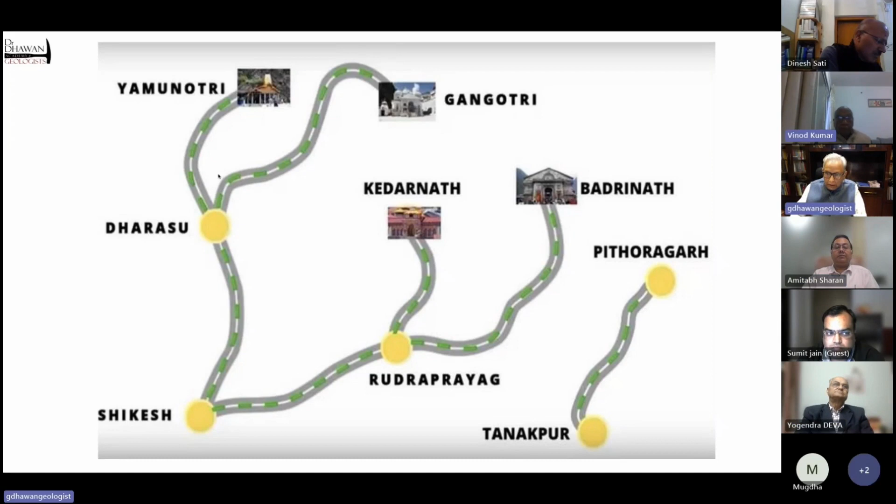This tunnel, Silkyara, is towards the Yamunotri side, between Yamunotri and Dharasu. After completion, this tunnel will... this is the portal of the tunnel, the Silkyara portal, as we call it. It is a 4.5 kilometer long highway tunnel, semicircular in shape, with a 12.4 meter base and 7.5 meter height.

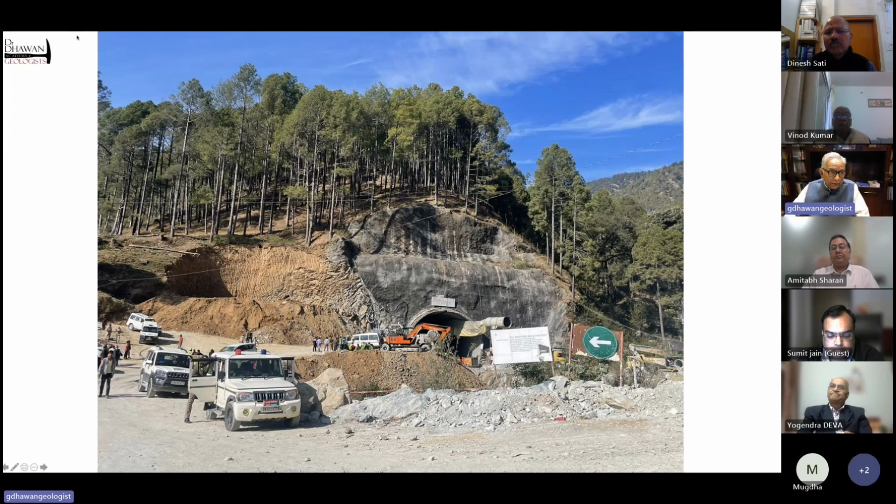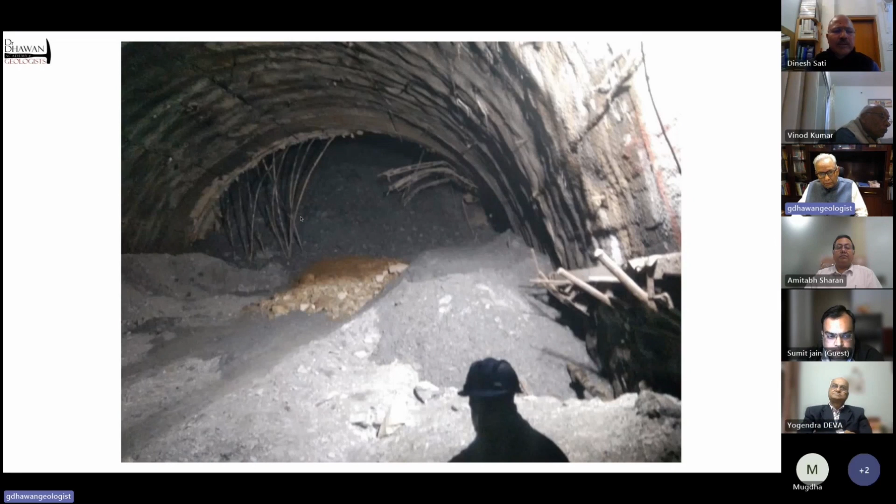One portion of this tunnel collapsed between chainage 205 and 260. These are the initial pictures of the collapse. Almost a day after that, this was the picture. You can see that debris is visible at the face, and a lot of lattice girders in broken shape are also visible.

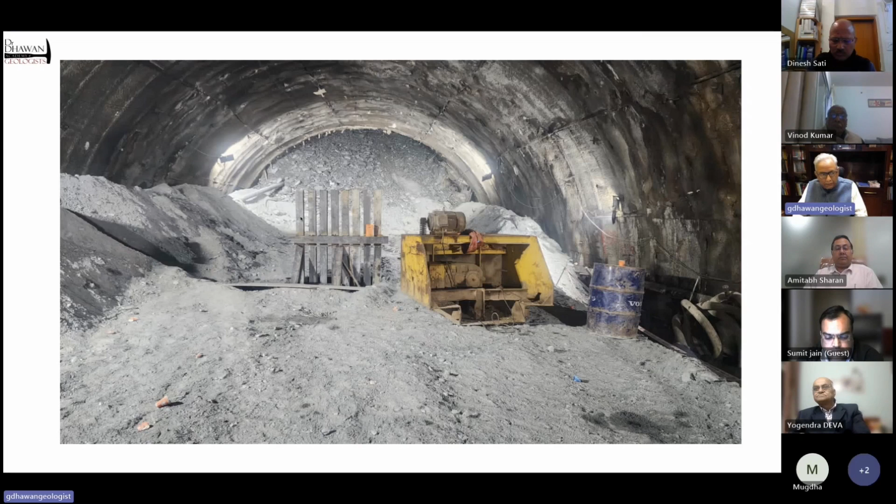Immediately after, NHIDCL, through Messrs. Navyuga Construction Company, who are the contractors of this tunnel, started the rescue operation and began removing the muck. However, as all of us associated with tunneling operations know, it really doesn't work that way, because the more they removed, the more came in. So you can see in this picture that the original mass of debris has now increased.

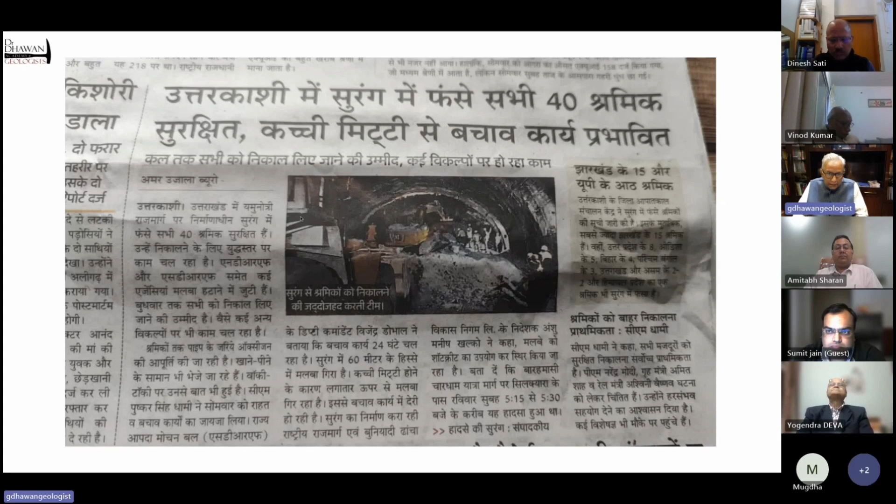Somehow there was a 4-inch diameter pipe, the original pipe, which became the lifeline for the workers, and it continued - the authorities continued to support the trapped miners through this, and the news was that they were safe and some basic necessities were being given to them.

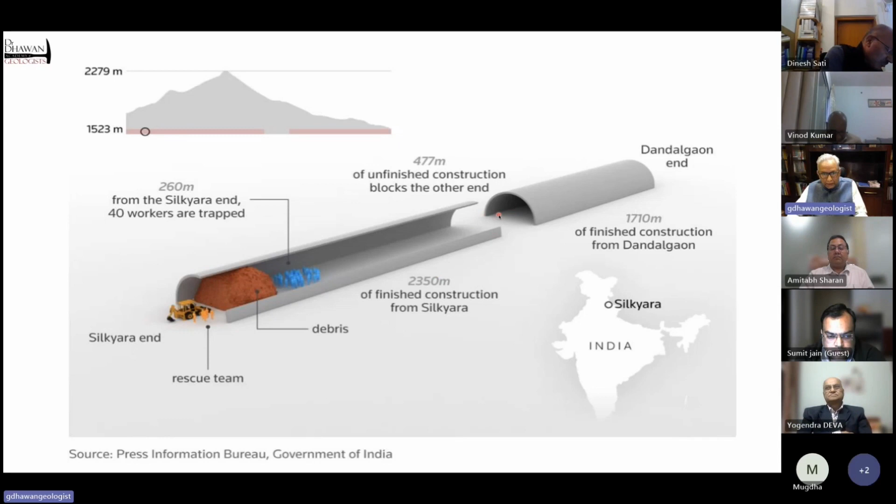Rescue operations continued through several means, which my colleagues and co-panelists will explain further. But in nutshell, once they realized that removal of muck will not succeed, an old auger machine was deployed from Uttarakhand irrigation, but it also broke down very soon. Then an American auger machine was brought in, but that also broke down.

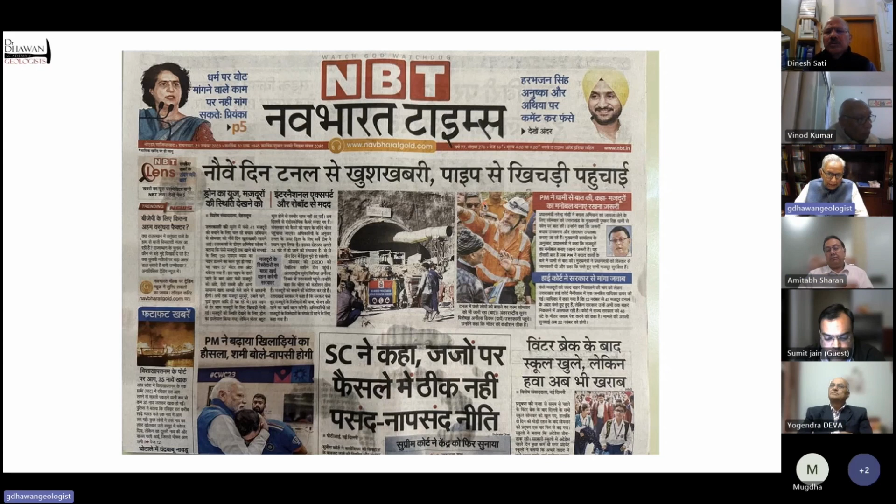But parallelly, NHIDCL continued to construct a second lifeline, and through that, by the 9th day, a 6 inch dia pipe could be inserted, and communication could be established with the workers. Finally some solid food was given, and an endoscopic camera was also installed there. So this is all. I think I will come back in the second round if you want more information from me. Thank you.

Thank you, Dhawan Saab. Thank you very much, that was a very good introduction to the tunnel. Having done that, now I think it is time that we had a look into the ground conditions of the tunnel, where such a collapse took place.

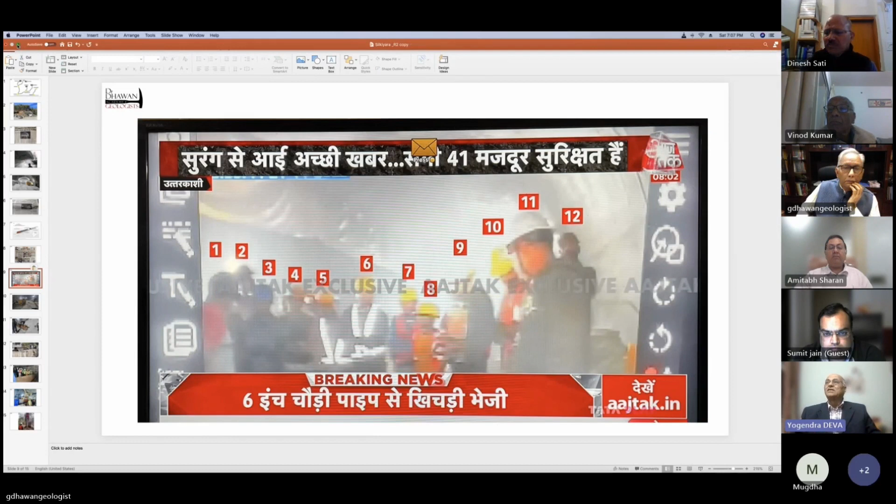So let us start with the initial work in that project area where the initial engineering geological assessment was made. We have with us Dr. Dinesh Sati, who has done some wonderful work there, and we believe his projections have proved right. I will now request him to brief us exactly what the geological assessment indicated, and what recommendations he gave for smooth tunneling in this project. Dr. Sati, please.

Thank you, Dhawan. I was involved in the project in the initial phase where the tunnel alignment was fixed by me, and the preliminary feasibility investigations were done in 2012, March-April. Because there was no immediate access to the tunnel alignment, geological information available on the outcrops along the highway were projected onto the tunnel alignment. To the best of my ability and knowledge, I projected the rock mass parameters and all the geological information on the tunnel alignment.

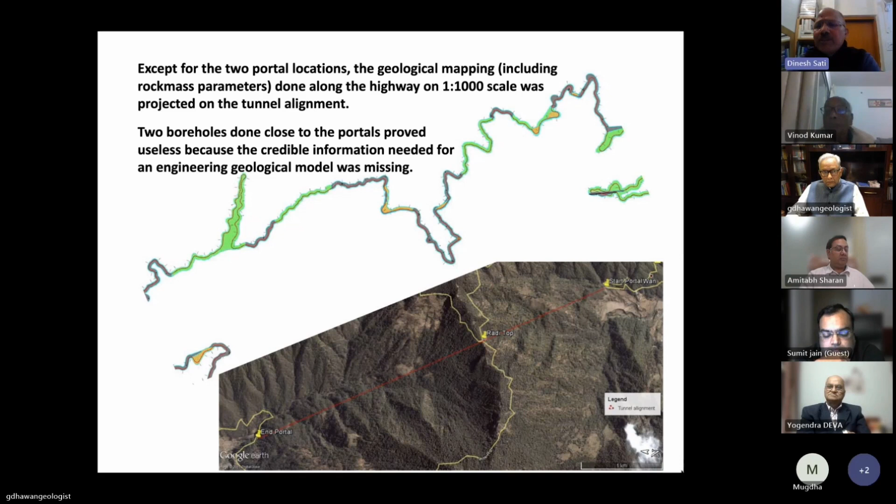Except for the Silkyara and Barkot tunnel ends, where I had enough outcrops to know the rock mass and structural parameters, on the chainage 300, CH 300, I projected the contact between the amphibolites on top with the siltstone and fine-grained sandstone sequence. That contact of about 40 meters was suspected as sheared, and exactly on that area only the tunnel collapsed, because it was already a sheared zone.

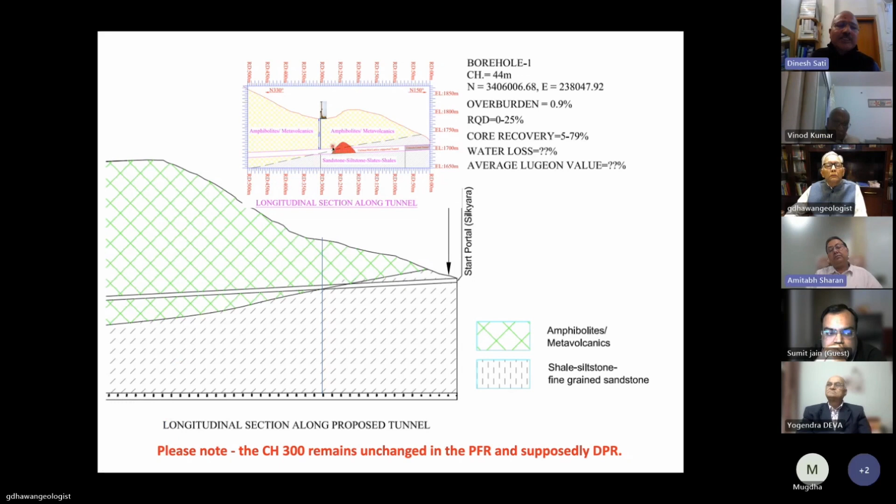But I don't know if further investigations were done by the authorities involved in the project execution. This picture was already there in the drawings which were supplied, for excavating and drilling from the top of the tunnel ground, passing exactly over the 300-meter chainage.

Metasiltstone, sandstone, and slates, often referred as phyllites, are class 4, class 2 to class 4, ranging in strength. But the amphibolite and metavolcanics are very strong rocks, class 1, class 2. The zone between these two formations, two different rock masses, is sheared on the outcrops I have seen along the highway, because conditions inside the tunnel should be a little wet, so the rock mass parameters go down. That is why this whole section experienced this cavity and all events, especially between the 200 and 300 meter chainages.

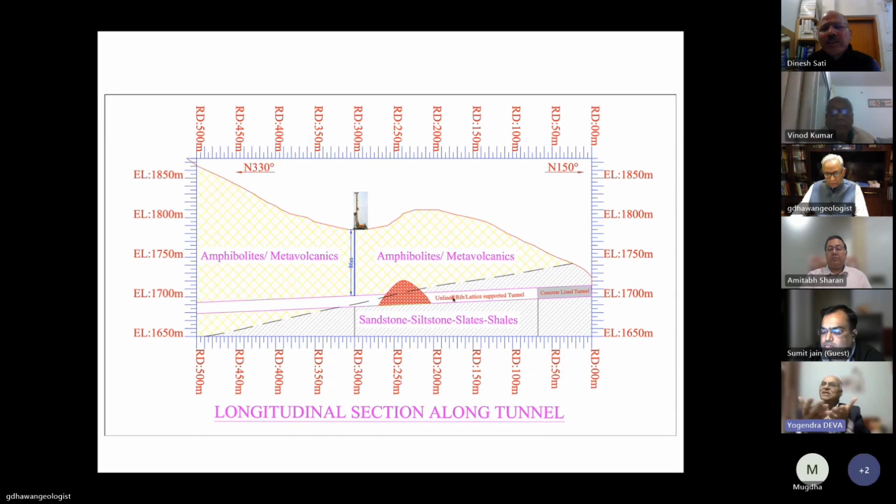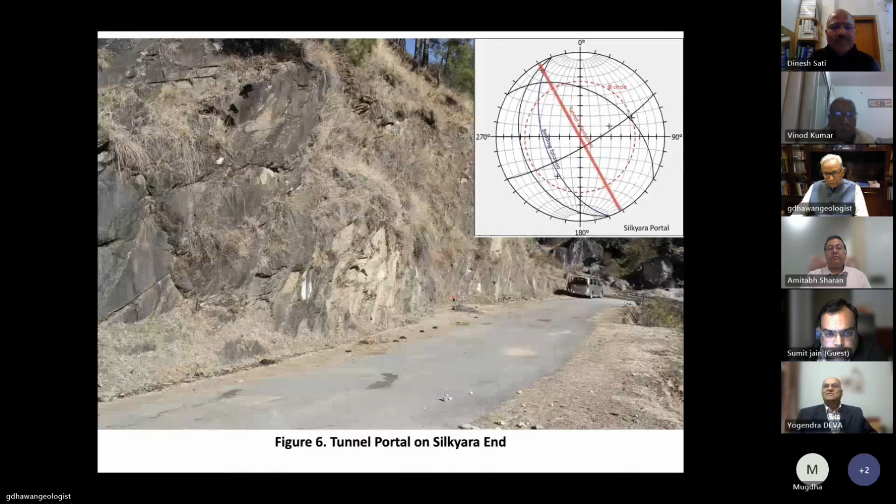It's very good, looks good. Yes, it's good. Only the zone between 200 meter and 300 was the critical zone. Can we have a look at the plan, at the springing level plan? Yes, briefing about the shear zone there. Do we have any other plan here? I think yes, this one.

The bedding orientation is not exactly parallel to the drive direction. There is a 27 degree variation, so it goes obliquely, and the zone was not so difficult for the tunneling.

Every shear zone has a thin zone of intense shearing, and on both sides the rock mass gets better. So this highly sheared zone should be much less, but of course the entire band between 235 and 300 changes. This was considered as class 4 or might go into class 5 also. As I see here, you are showing the width on the plan to be about 40 meters. But obviously because of the angle between the strike and the tunnel direction, this width will increase along the tunnel, and that is why we are getting such a large span failure in the tunnel.

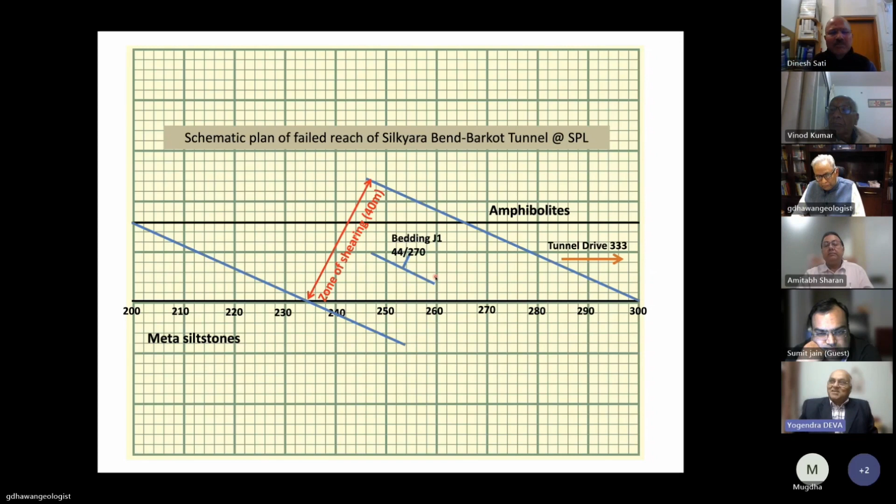Thanks for your observation and comment, Dhawan Saab. It's a remarkable job which has been done in the PFR stage. Now I understand that we have Amitabh Sharan with us, and he has been associated with the detailed engineering investigations. I think he must be having a lot of information after Dr. Sati made his exit from the project after his work. So, Amitabh, can you share with us the data which you have, or the experience for this tunnel?

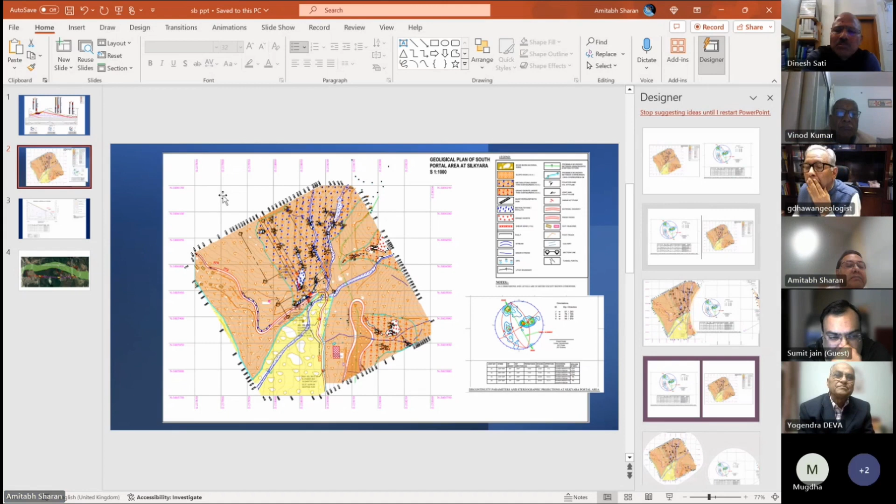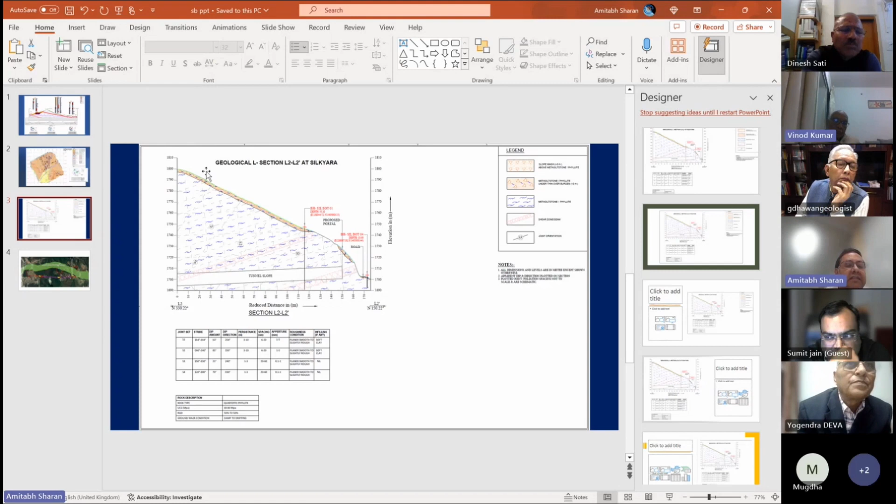And this is the closer view of the section. This is the foliation direction. The lithology is metasiltstone, or you may call it phyllites. It's in transition in between. So this is the one map of granodiorite intrusion.

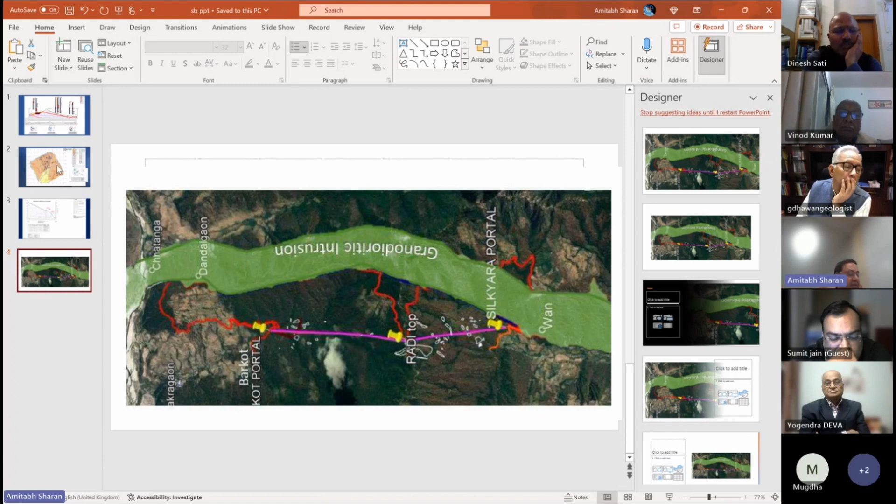We got that from some Google paper, so we projected this data also. So in our projection, this band has gone below the tunnel alignment. And during construction, most of our sections, what we projected till date, has already matched with the actual construction at site.

So in my interpretation, the entire tunnel alignment is driven through the soft metasiltstone, which is highly crushed. At some location it is enriched in muscovite also, phyllitic, sometimes it looks like phyllitic in nature. Accordingly, we already gave the details to our designer, the Bernard, Austria. They have designed based on our geological input.

Thank you. Right. Thank you, Amitabh. I notice one thing here that I can see at the Silkyara, the geophysical survey result shows a low resistive, low velocity zone, which is almost touching the tunnel ground. Yes, that end.

But that rock, where the low velocity zone is coming, that rock should be the competent amphibolite. No, sir, it's not amphibolite. In my projection, that amphibolite or that granodiorite intrusive just goes below the tunnel alignment.

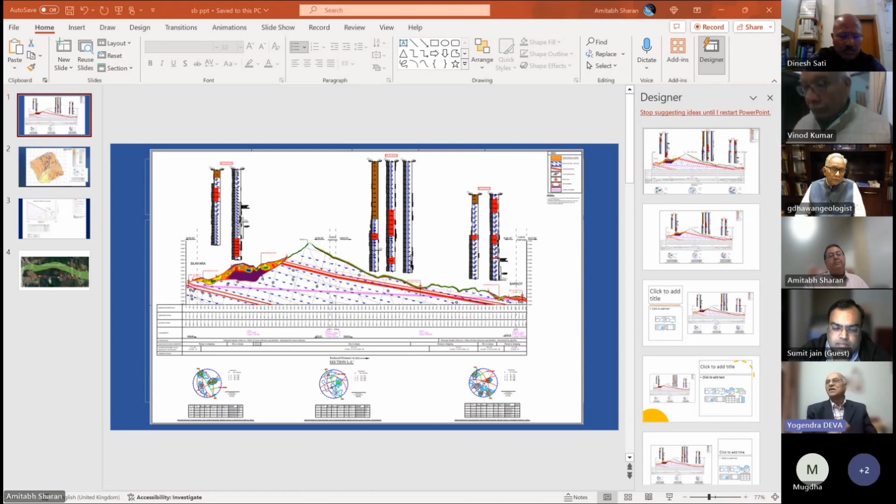Before we go to the other technicalities, I will turn to Sumitji and ask him what he thinks about the design of this tunnel. I am representing the audience here, I will say I'm a layman. I understand probably that all tunnels like this, transport tunnels, have an egress, and egress is normally a parallel tunnel which goes along the tunnel alignment. So had an egress been there for this project, maybe this rescue operation could have been easier. So from that angle, I would like to learn from him what he thinks about the design of this particular tunnel, where at least I don't see any egress. Sumitji, please.

Coming to regulations for safety in transportation tunnels, there is a particular requirement that the safety or escape path for tunnel users, be it during construction or operation, should be totally separate and isolated from the main tunnel being constructed. We can take the adjoining tunnel as a safe escape path, or if the same tunnel cross section provides a safe area for escape, this should be available for rescue of persons under all possible events. For example, in the Atal tunnel, the safety path is just below the carriageway of the road. That strategy is perfect when it comes to regulations for safety in transportation tunnels.

So in no case should the tunnel not be available for rescue. That is the prime concern and the main strategy for designing the project.

Coming to Indian Railways, a separate escape tunnel is already mandated by the Railway Board, and all our railway tunnels have an escape tunnel parallel to the main tunnel, which is a non-traffic tunnel. For all tunnels more than 3 kilometers long, we provide such provisions.

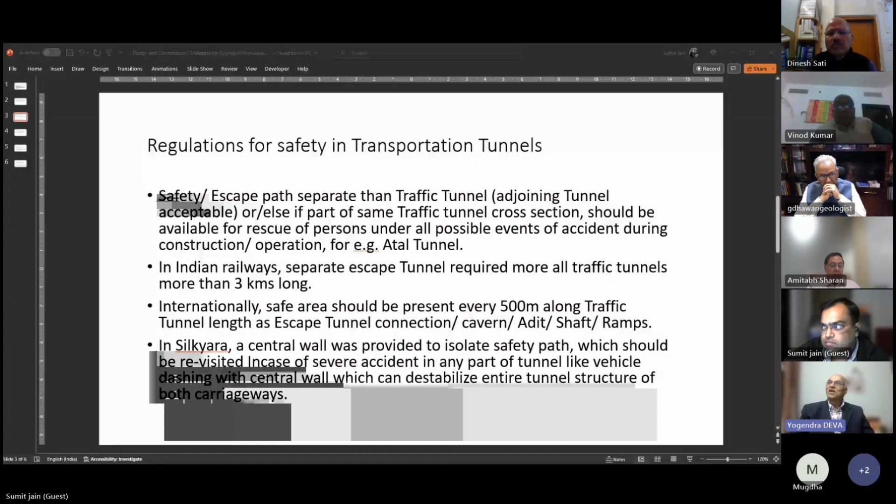Thank you, Sumitji. This is very interesting and quite illuminating. Having introduced ourselves to the ground conditions about the design and other things, now I think is the time to come to the main rescue operation and its technicalities. For that, we have a very experienced tunnel engineer, Vinod Kumar. I will request him to kindly enlighten us on what exactly was done there and how it could have been done in a better way, whether it was possible.

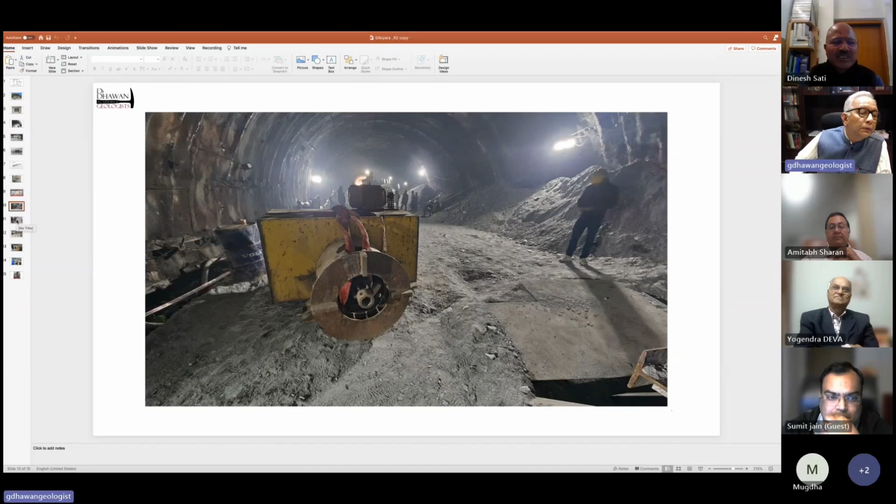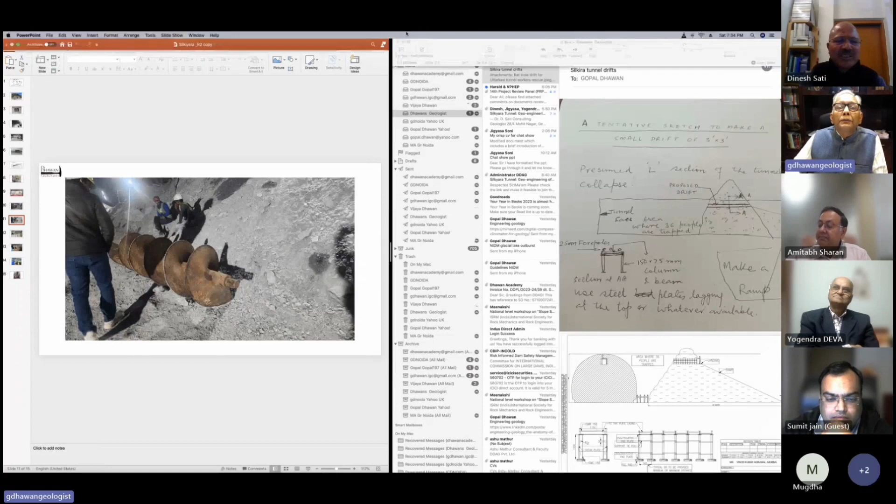This is the long shot of the tunnel where rescue operations were going on. This is the old auger machine which was pressed into service first. As per the newspaper report, this belongs to the Uttarakhand Irrigation Department. It was tried and worked for some time - it went a couple of meters ahead, but finally broke down.

What happened with this machine was - the function of the auger machine is, you see the spiral blades, so as it cuts the debris mass, it spirally brings out the material, and a circular hollow space is created. The idea was to insert 900 mm pipes by jacking.

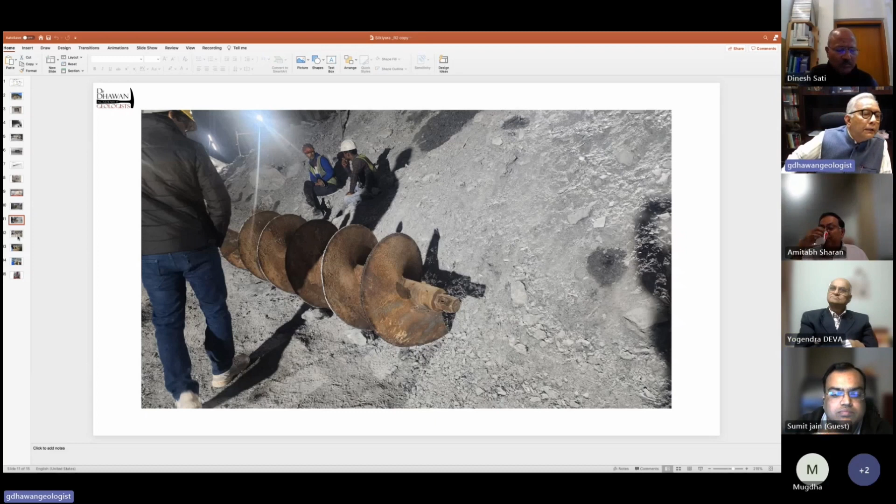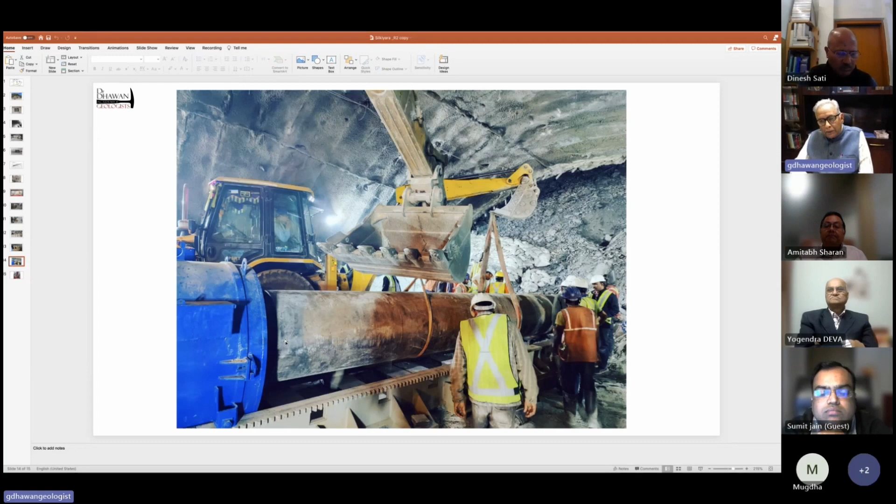So this was the original machine, and when it did not work, then this American auger machine was brought in, the blue colored one, and the pipe is inserted through this. This machine also broke down after going about 25 meters or so.

So there was a state of panic when it happened. Everybody thought that now everything is finished. At that stage, the leaders who were leading the rescue operation there from various departments stepped up.

One good thing about this rescue operation is that the whole of the country joined hands together. Can you imagine there were more than 12 government organizations, all very competent and specialized, who were there - namely NDRF, SDRF, NHIDCL, Geological Survey of India, our own department, ONGC, SJVNL, Rail Vikas Nigam Limited (RVNL), RITES, Border Road Organization, and Indian Army. Coal India was there because they have a lot of experience handling mine collapses, particularly in Mahabir Colliery where there was a collapse and they rescued everybody through a vertical hole. Then CIMFR was there and Uttarakhand departments were there.

All the good private companies tried to join the rescue operation, and many of them did it voluntarily. Like our friend Dr. Sanjay Rana, he sent his geophysical team from Parsan Overseas, which he owns, and they did a wonderful job to support the rescue teams so they could look ahead and see what lies ahead of this auger drill route.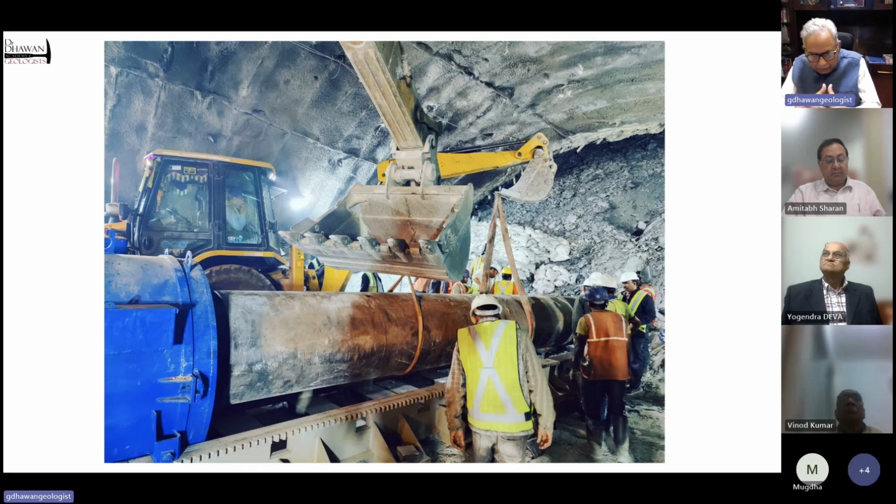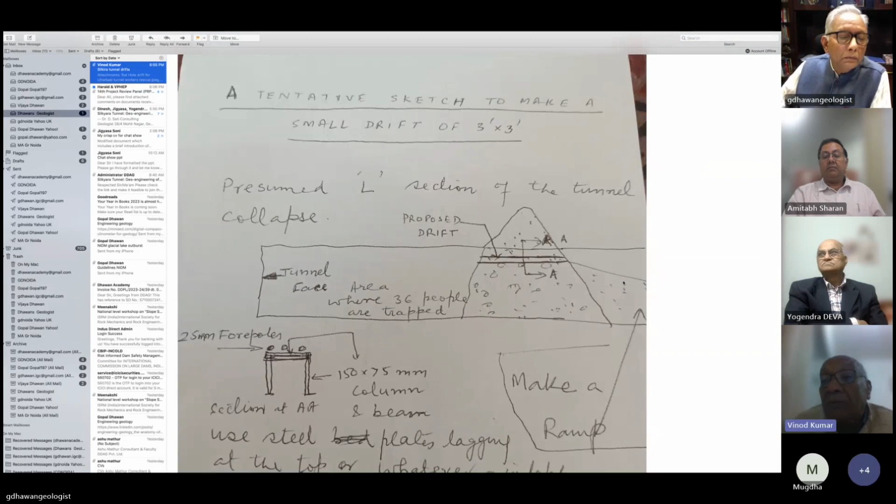I have heard Dr. Sati, Mr. Jain, everybody, very nice. But then the point is to save the people in minimum time. That was the objective above all else.

The arrangement of putting pipes in the hole, or vertical drilling, everything - for mobilization of every activity, it is time consuming.

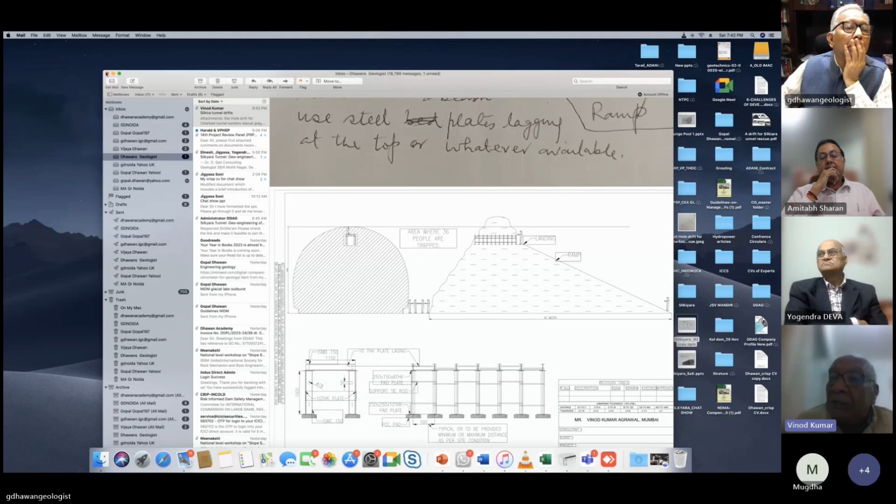So my idea, as I gave in this sketch, was a small drift at the top. And Dr. Dhawan, the people who made this drift, are simple workers. You can call them rat miners, because to construct a 1 meter by 1 meter drift is not a simple thing - you have to go crawling in a very limited area.

Why 1 meter by 1 meter? Because the excavation quantity should be less, and you should have more linear progress. That was the idea. Anyway, now the job is done.

My point is, for the future, this type of program should be given to disaster management people, that in any project, if such an eventuality takes place, no mud removal whatsoever - they should try to approach access through the fallen mud by creating some passage, whether through small drifts or through pipes, as they did it.

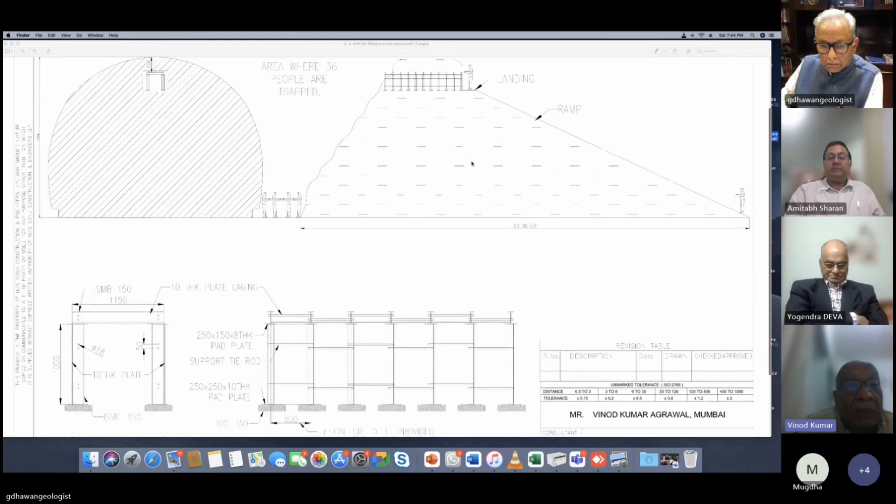Now pipe pushing - again, this machine is not regularly used in any tunnel projects or sites. It is a bought-out item, you have to arrange it, like micro tunneling, you have to order it. So here it was ordered first - they arranged a machine from the Uttarakhand government, then a second machine from somewhere else.

And one thing is for sure - the machine broke down not because the machine was faulty, it broke down because it came in contact with a boulder.

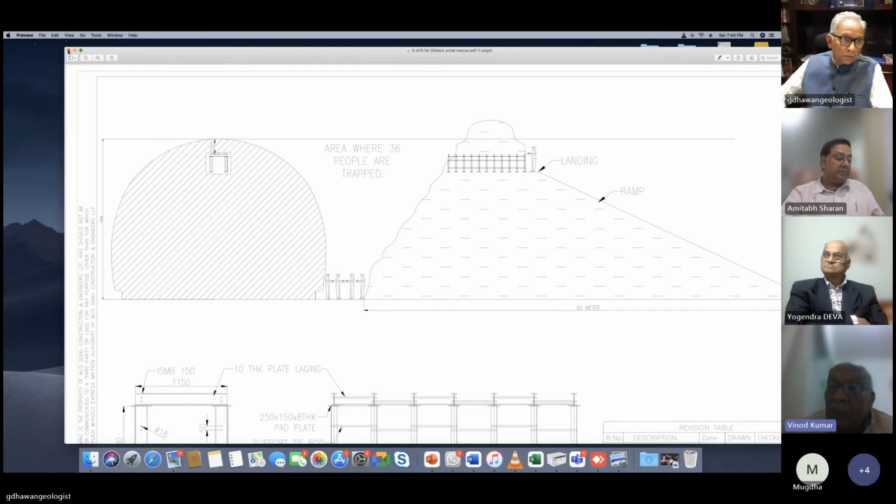Those lattice girders which were lying below the buried mud broke due to that fact. I had one gentleman, Mr. Harpal Singh, who was supervising this work and was involved at this site. He gave me feedback that when they were trying to reach after 45 meters, he suggested there was a jumble of girders in front of the pipe, and they would not be able to break these pipes with the auger. They contacted the owner of the machine, who said his auger was very strong and could cut anything. They put the auger inside the pipe again, and it got spoiled. Ultimately it had to be cut and taken out one by one. So that activity delayed the progress.

At 45 meters initially, when they had reached and encountered the steel in front of the pipe, they should have simply stopped the activities, put the rat miners or welders and gas cutters inside the pipe, cut those things and removed them one by one. Probably they could have saved 4 or 5 days in this process.

The escape tunnel, Mr. Dhawan has spoken and Mr. Jain has already told you. This is essential in such type of tunnels. It provides a second line of defense, as well as much better knowledge of the geology in advance.

So for this type of thing, vertical hole drilling, again Dr. Dhawan, it takes time to mobilize the machine, and the whole geology had not been surveyed properly. Now what I see from the pictures, it was a 1 feet drill hole initially done. Had they done another 45 meter hole also, afterwards they still had to ream it. My experience is that reaming the hole, with these raise climbers or raise borers, they do it at the sides. They put a bigger side bit below the rod, and then they go on lifting and it keeps enlarging the hole. So that drilling was also not an easy option.

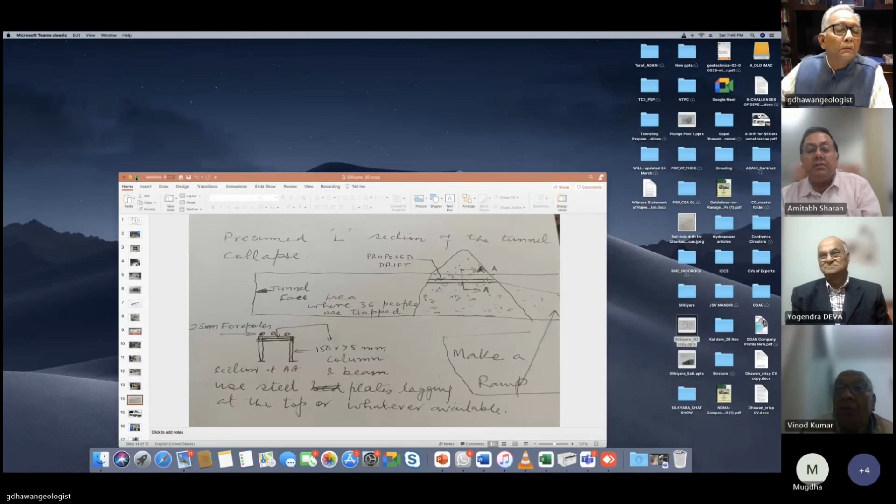Whose idea was this? There was one person, Harpal Singh. He used to work at Chamera 1, then he worked at Nagpur. Now he is in charge of this Zojila tunnel for MEIL. So it may have been his idea, but he used to tell me every day, sir, we meet and discuss.

Mr. Deva, I would like to come in for a minute. Actually, Mr. Vinod Kumar could not show you his slide because he is speaking from Abu Dhabi at present, and he is in transit. So this is the sketch which he shared with me on the third or fourth day of the incident.

He was very clear from the beginning that a drift should be created at the top. Let me show you with the laser pointer. This is the collapsed portion, which this sketch developed by him shows, and this is the ramp. Through the ramp, he says we could have gone up, and this was the minimum thickness of the mud near the crown. The second advantage was that there was a lot of lattice girder buried under the muck, and a lot of equipment was also there. So it was expected that almost at the top such problems may not be there.

But the only thing was, because he was in Abu Dhabi and we were here, we shared these ideas on LinkedIn with many people. He also shared them with Mr. Harpal Singh. But in the meanwhile, this auger drill had almost reached its end. So you asked at what stage the idea of rat miners was decided. I heard from Mr. Vinod Kumar at that time. He had the idea of doing this drift by putting someone like rat miners, as we have in our hydropower projects. We have trained teams for doing investigation.

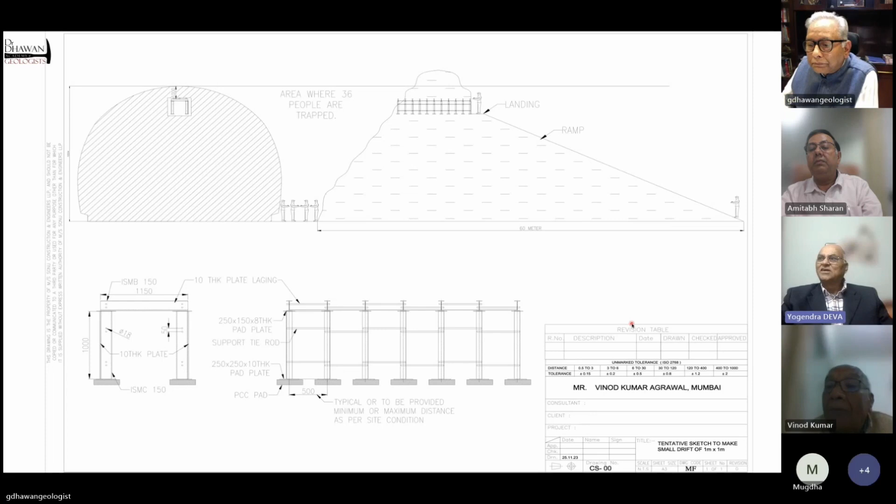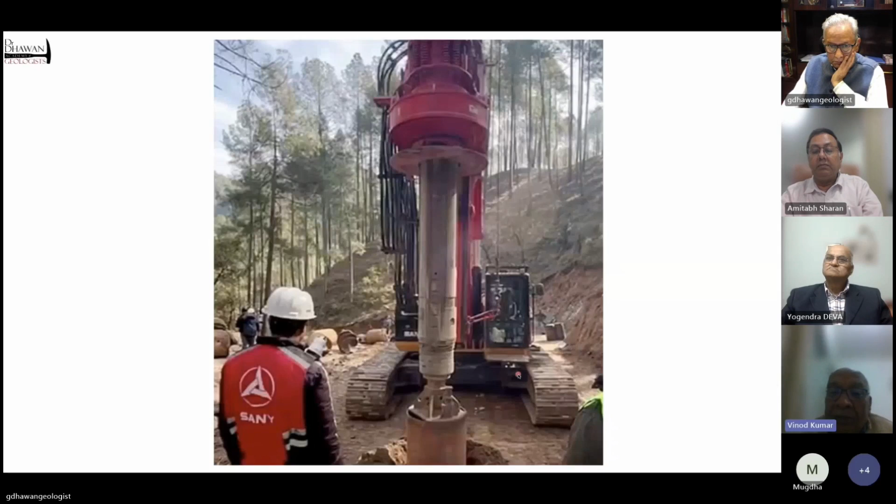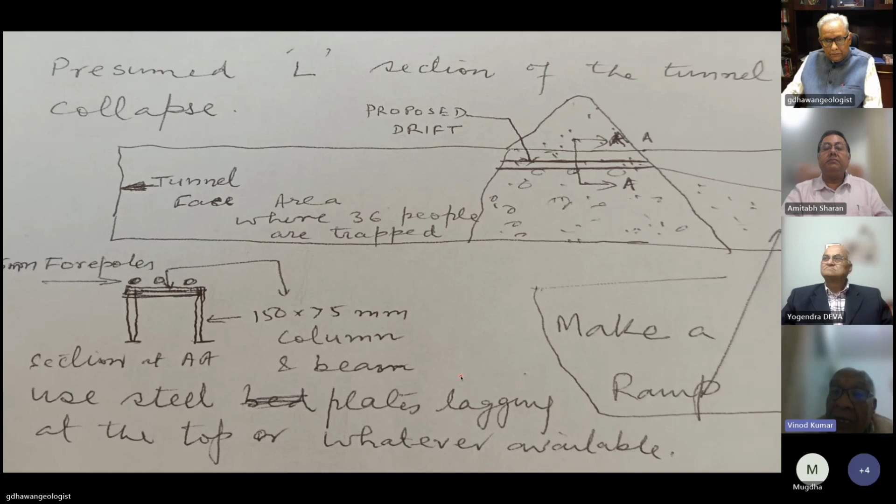I will take Dr. Dhawan please. Just keep this sketch here. This is what I shared as my handmade sketch on the first, second day of the incident, and I was frantically trying to tell somebody at site that they should not remove the muck. But every time, at every project, this happens - people just come inside, remove the muck, and make the situation grave. That's exactly what happened on this project. Had they not removed the muck, and instead brought some good rocky material from outside and made a ramp like this to reach this point, this would have been done in 8 to 10 hours, and the drift length would have been hardly 30 meters.

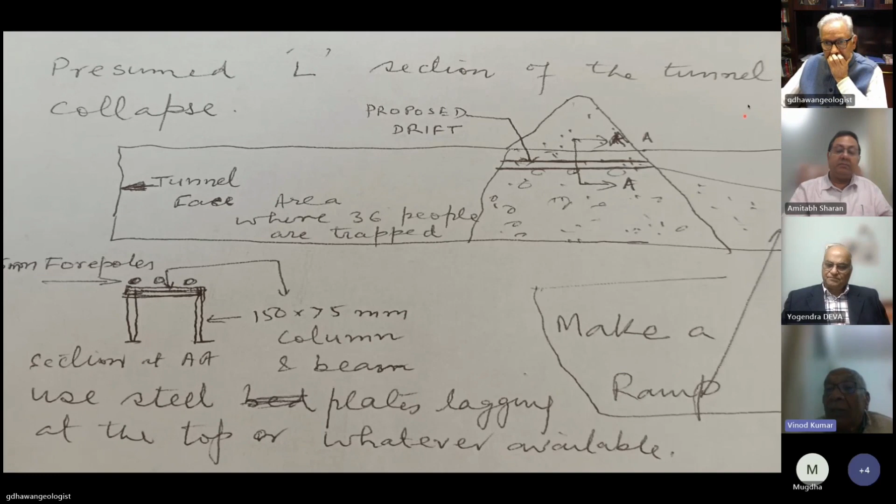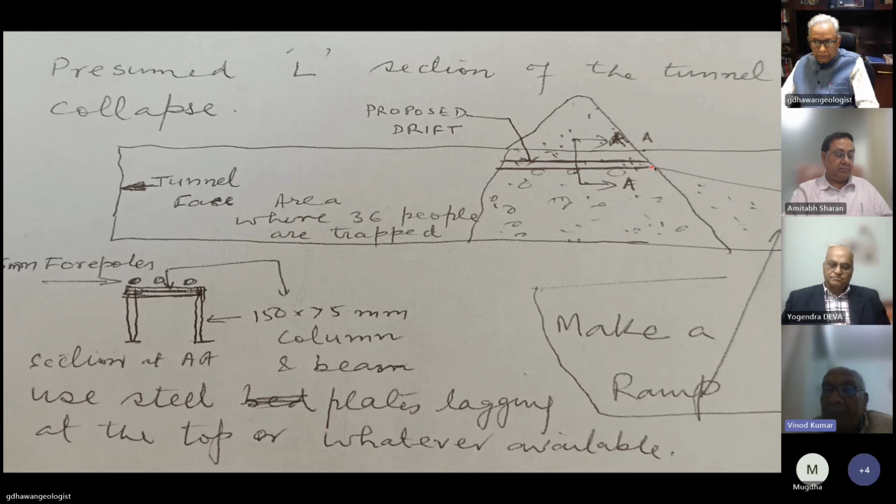Sir, your rat miners were required at this stage - they would have just done the job in 2 days. This is the drift. I sent a message to Arnold Dix also, because we had met last April at Pune, and I thought he may recognize it. But the thing is, there were so many agencies involved and so much pressure from the media, government, even the PMO, that things had to be done the way they came on the way. That's all, sir. Thank you.

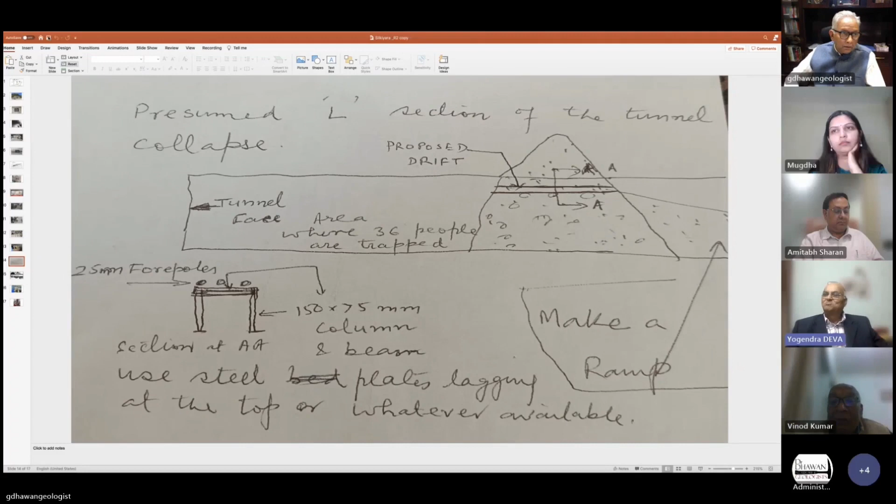Thank you very much. I think now it is time - we have taken a lot of time here for the discussion. Now it is time to conclude. So I will ask one question, from Sumitji, who is sort of a project owner making tunnels. In an emergency like at Silkyara, what should be the approach of the project owner? In this case, NHIDCL was there. What should be the approach? Who all should be consulted for an immediate decision on what exactly is to be done? Is engaging foreign experts a must in such situations? Because this particular incident has shown that the Indian team has done it, and it's a remarkable rescue operation they have carried out. So, as a project owner, what do you think should be done in such situations, Sumitji?

Sir, as a project owner, I think that firstly, if our company was there in that scenario, we would have collected all the data that we had recorded while the first stage of tunneling was happening, 3 to 4 years back. We would have also collected the convergence data for the next 2 or 3 years, and analyzed what is going on behind that stretch before even touching or reprofiling it. That would have been our first strategy. Secondly, coming to the event, we would have shared that data transparently with the best experts we were aware of, Indian or international - it does not matter. We would have shared that data across a website and invited comments from all around the world. Then, in the Indian circumstance, looking at whatever the best machines were available nearby the project site - because time is of prime importance to rescue at the earliest - looking at the solutions that would have come forward, and all the possibility of nearby machines, we would have adopted the best approach in that case.